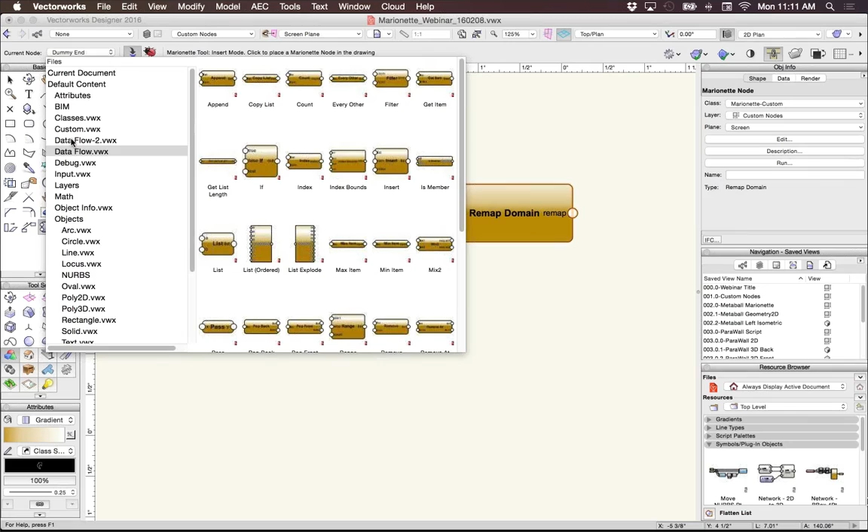And we'll call it data flow 2. So if we go back to our original file, and now when we go to the library for Marionette, you see that the data flow 2 has shown up, and there are our 3 nodes ready to be used in our drawing.

As with the last webinars, once we have saved the file, the files I show can be downloaded after the webinar. So all of these nodes and definitions will be available for you to use and study in your own time. Some of these custom nodes are already available on the forum.

Okay, do we remember this definition from last webinar? We used it to demonstrate debugging, but we didn't get a chance to see what it actually does. So let's run it now.

And we see that it creates a sphere of slabs that can have a certain thickness and a certain distance between them.

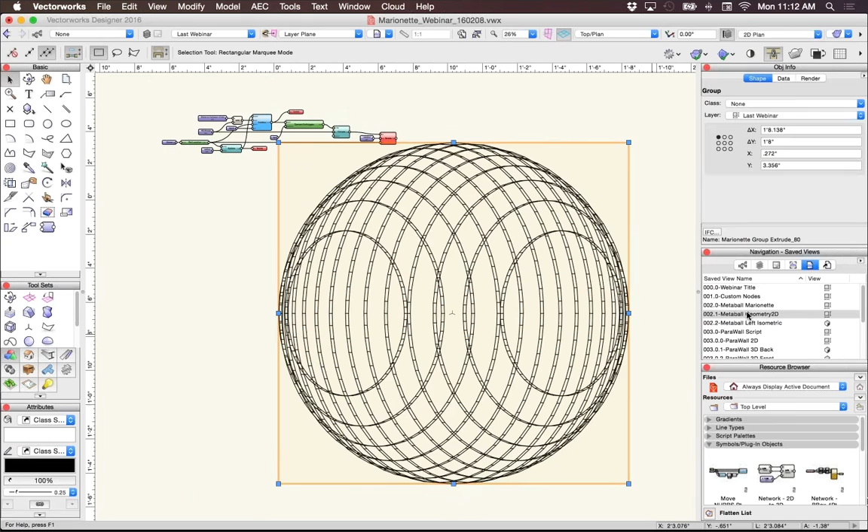So to refresh our memories, let's turn this into a Marionette object. It's a prime definition for doing this. So first, we need to change the definition a little bit.

The way I work with definitions, when I have more than one on a layer, instead of having all the geometry show up at the origin, my trick is to put a locus point in the drawing and then name it, and then put in a name node and a get location, and use that as the origin point for my geometry. But if we're changing this into an object node, we do not need this.

It'll automatically center on the wrapper. So we can delete these two, and we can put in a Point3 node. That's defaults are set to the origin.

So now we can wrap this up. And I could turn this into an object node if I right-click on it, but first I want to save the definition inside as a symbol in case I want to change it. So let's go to Modify, Create Symbol. And then we're going to uncheck Convert to Group.

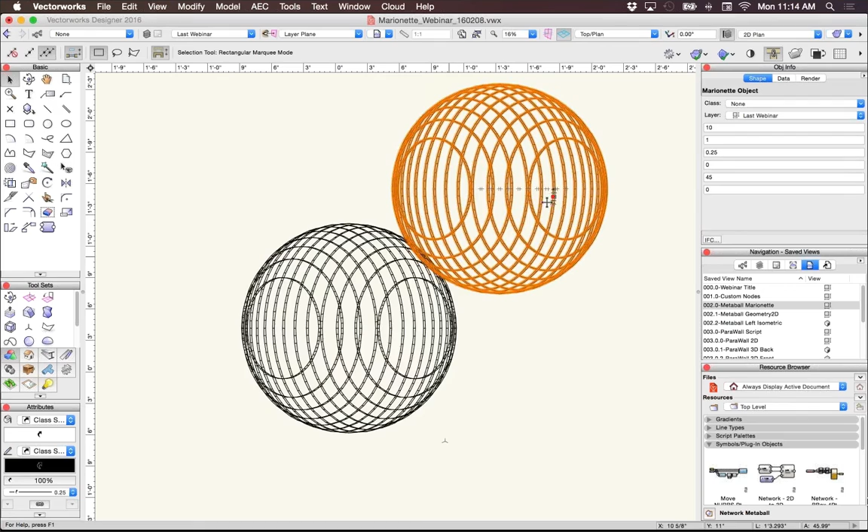And now, let's turn it into an object node. So here we have it, and we have the editable parameters on the side. I can make several copies, and I could change the parameters on each of them if I wished.

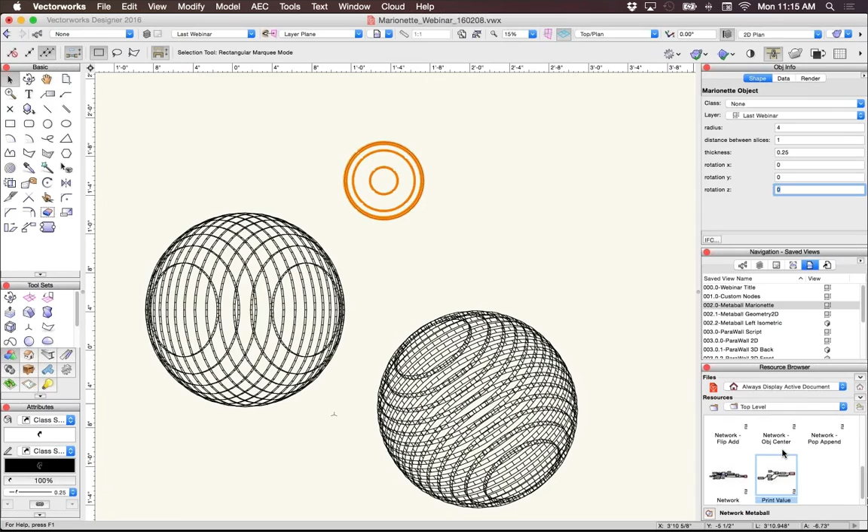So now I have the same object node, but it's been copied and changed around. But say I want to change the definition, and instead of using spheres, I want to use some other 3D object like a cone. So let's get our network back and go to Edit 2D Component, and let's change the sphere node to a cone node.

So this also has another parameter that we can add in. Basically, it's the length of the cone if we want to make it different than the radius. We'll call this height, and we'll make it the default 20.

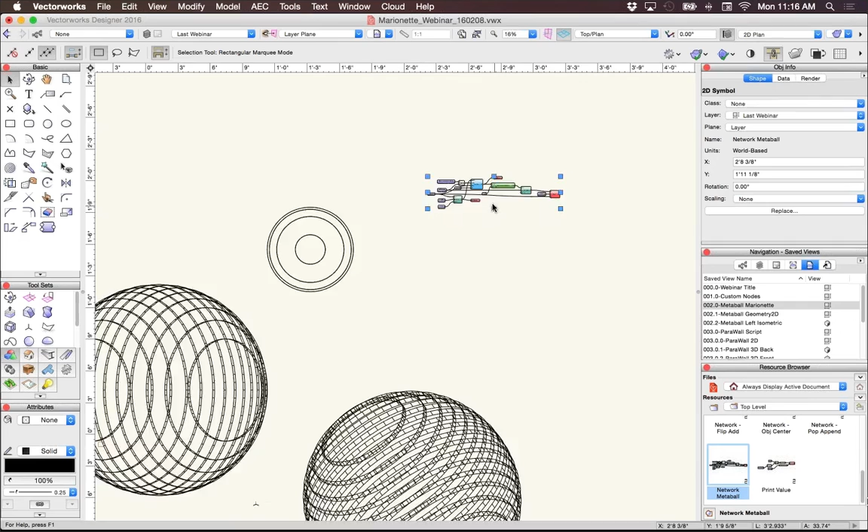And now we'll exit the symbol. We see now that they've been updated, all of these objects have been converted to cones, but they've kept the different parameters that we changed, as well as added this new parameter with the default value.

So are there any questions at this point?

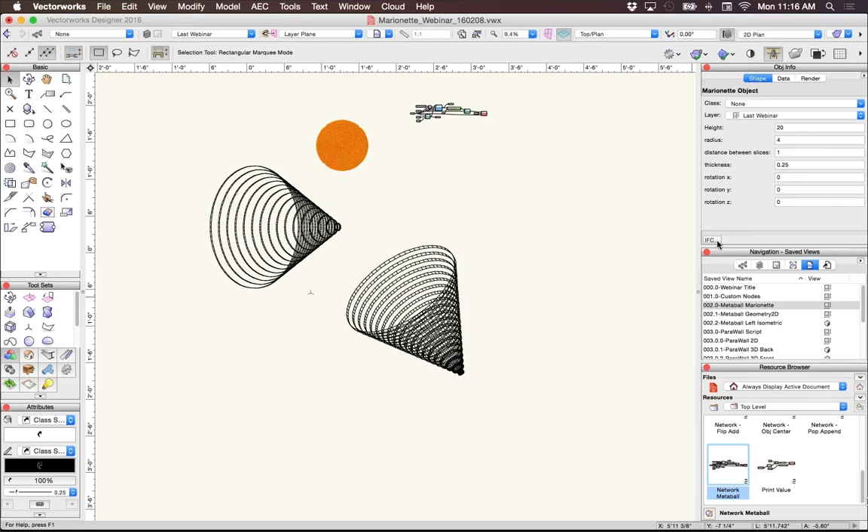When creating a 2D polygon or 3D polygon, how do you instruct what order the points are created? Well, a good way to do that is to use an ordered list node, which is in the data flow category. Actually, it's called list ordered. So when you have your points, you can put them into the inputs of this node in the order that you want, and then you will always have the list come out in that particular order.

So let's look at another definition. This definition uses the random node that we saw last webinar, as well as get and set rectangle. The get and set rectangle nodes used in this definition were edited by Marissa and now include a drop-down menu that allows us to choose an anchor point for our rectangles, just like we can with a standard rectangle in the OIP. We're also going to use Marissa's chunk list node.

This definition creates a gridded wall with openings on one side that taper into random size openings on the other. So let's see what this looks like. It's a heavy script, so it always takes a few seconds to run.

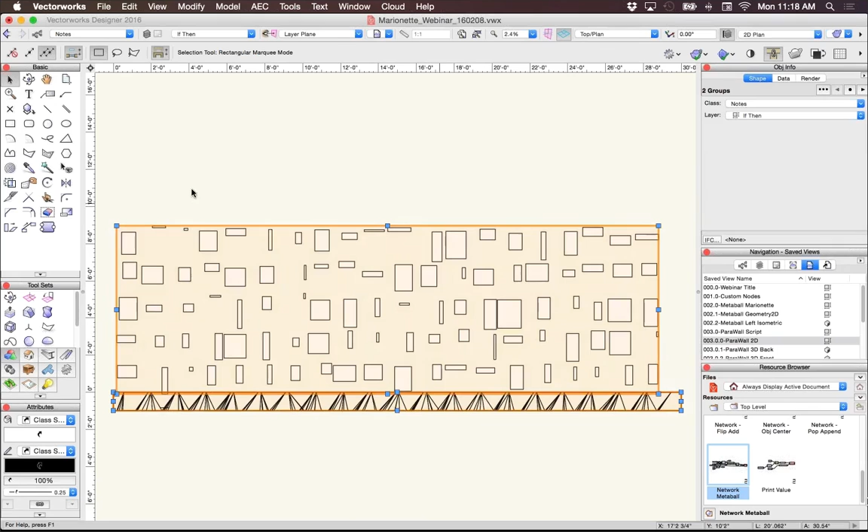So this is what the pattern is. And then this is the back side of the wall with the original grid. And the front side of the wall with the random grid.

So let's break down this definition a little bit. First, we're just drawing a rectangle that will be the outline for our wall. Wall length 30 feet, wall height 10 feet.

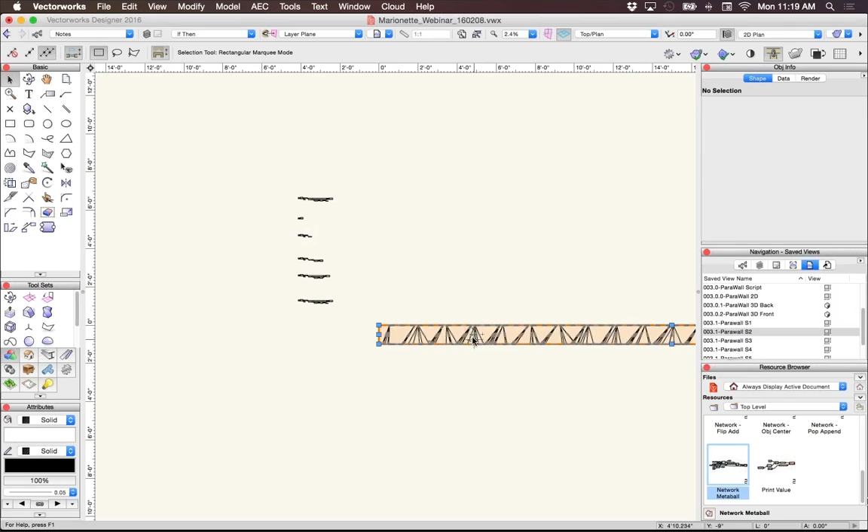And then we are adding the rectangular grid using this definition that we used last webinar to create a grid. And if we look at it, let's delete this. And if we run this, that's what it looks like.

So the next thing we're going to be doing is we're going to be randomizing the rectangles, and then resetting them. So now it's going to look something like this.

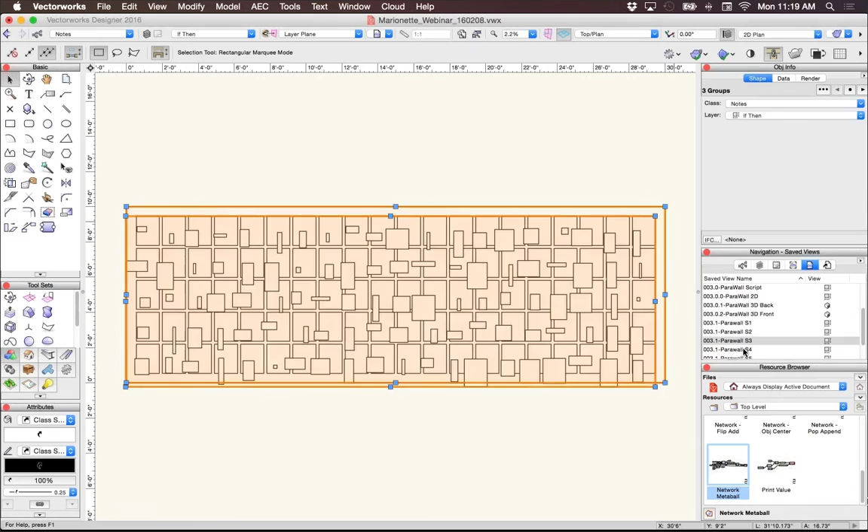And now for the last part, we're going to extrude the two rectangles, extrude the wall and attach the two rectangles with a loft node. So this is where the chunk list node comes into play.

So right now we have two lists of rectangles that have been converted to NURBS curves, the standard rectangles and the random rectangles. And if we zip those two lists together, we get the first one, first regular rectangle, the first random rectangle, second regular rectangle, second random rectangle, and so on.

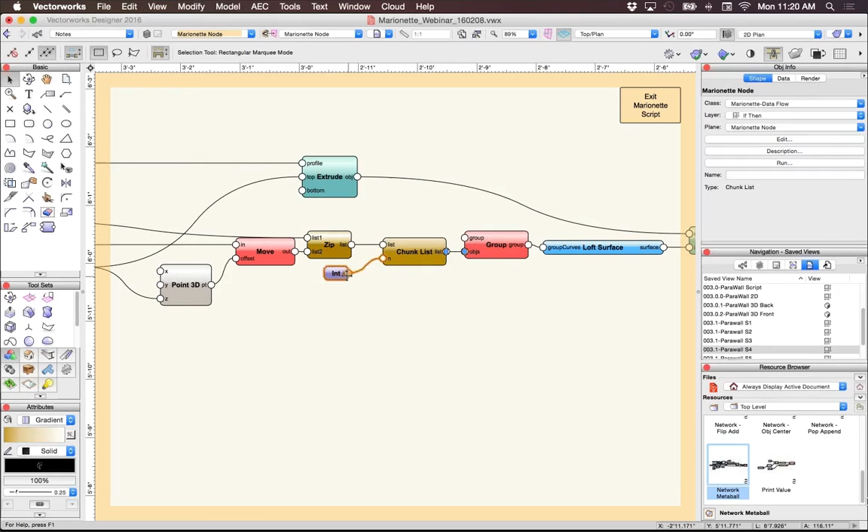And what we want to do is to create a series of lists that each have two of those rectangles in them to then loft them. So this is the chunk list. If you give it an integer of 2, it now, instead of lofting all the rectangles together, it'll loft 2 and then 2 and then 2.

Taking a minute here. So that's what we get.

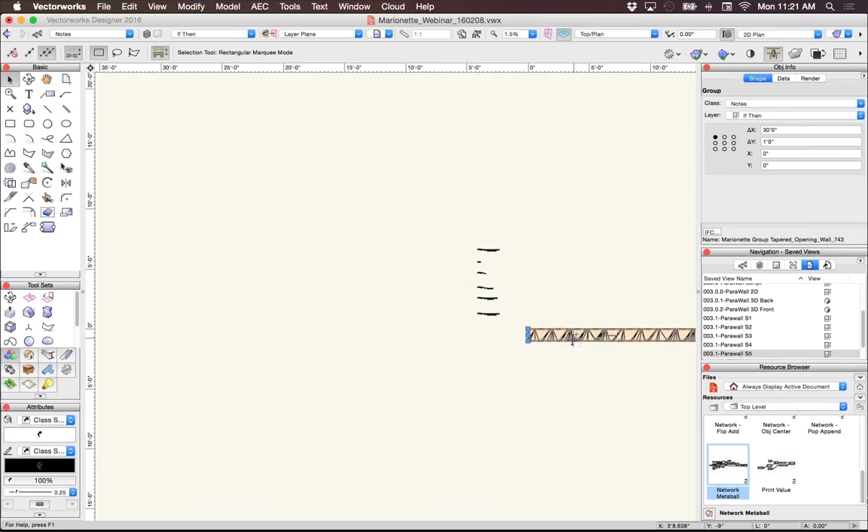So when using the random node, it's important to remember that every time you run the definition, the random numbers change. So in this part, I added a chance to show the random rectangles in 2D form so that they can be saved for later. And so this is what we get.

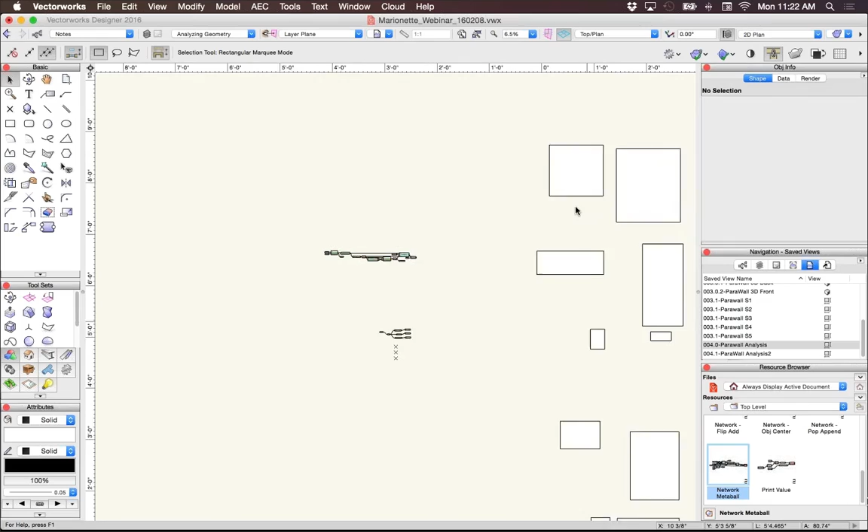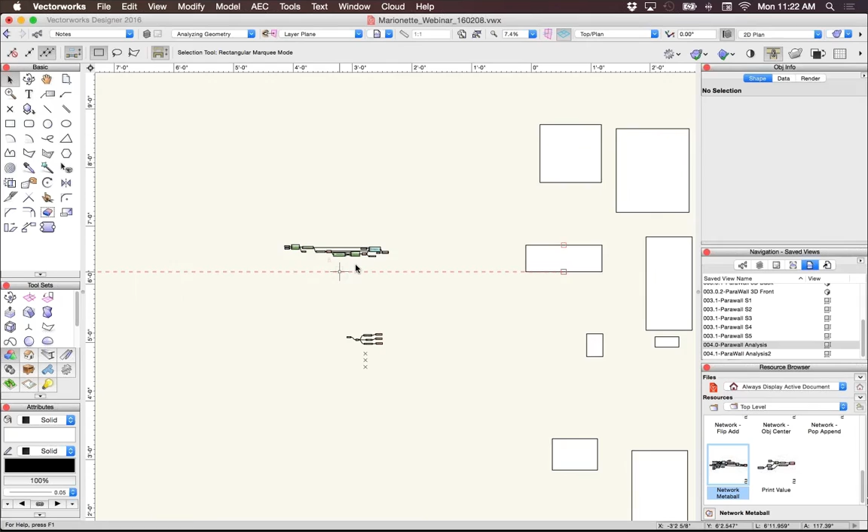So the great thing about Marionette is... oh wait, I want to add some conditions to this. Totally forgot. So we have this wall, but we want to make sure that the random rectangles meet some sort of conditions. So let's add some conditions. Say that we don't want any rectangle to be more than twice as high as it is wide. If it is, then we'll flip dimensions. So we're going to be using some conditional nodes and the if node. So let's go back here.

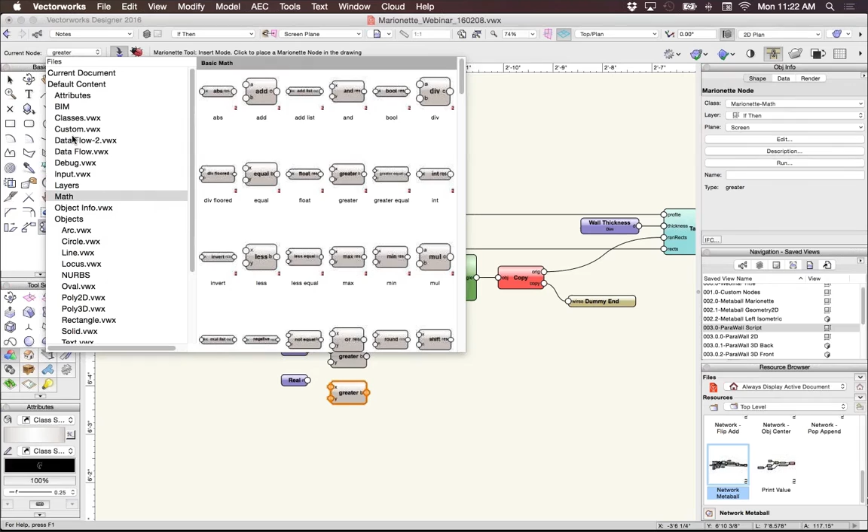Going to get some real nodes. Going to get greater than node and the all-important if nodes. We're also going to want multiply nodes because we're going to be comparing multipliers. So if we want to make sure that we don't want any rectangle to be more than twice as high as it is wide, we can say take the height, and then we can take the width multiplied by 2.

And put it into this greater node. So now, when it takes a value, if the height is greater than twice the width, this Boolean will be true, and if not, it'll be false. So what we want to do is attach this to our if node, and if it's false, we want to keep the height. But if it's true, we want to flip them. So we'll make the width the true option.

Now let's move these down out of the way. Give ourselves some more room. So since we did that for the height, we also have to do it for the width.

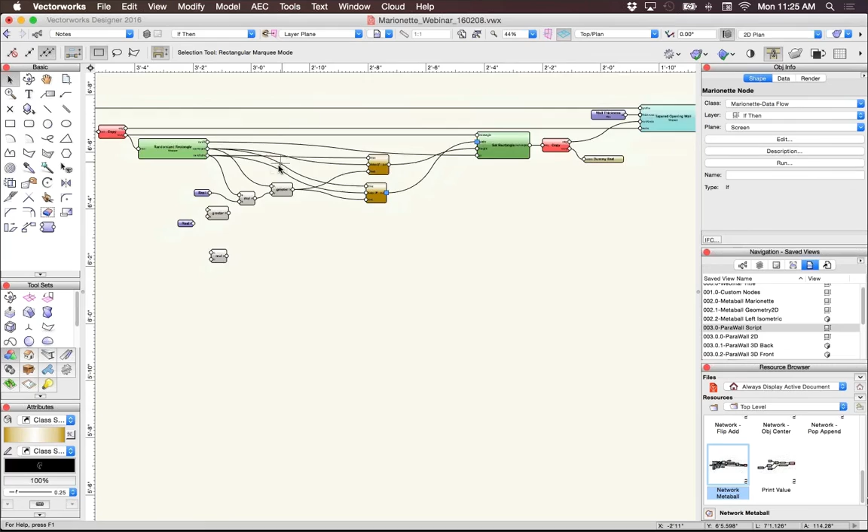Oh, looks like we have more than one definition that got run. So let's run it again.

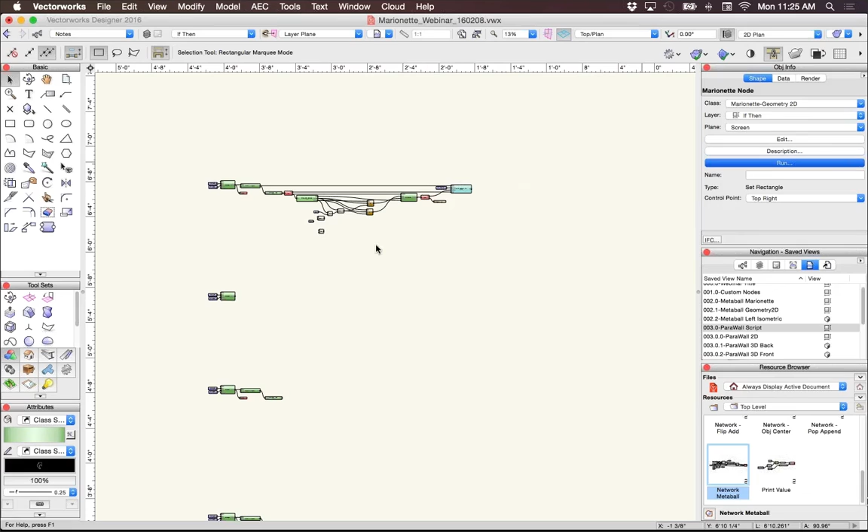As we can see, we don't have any tall rectangles. They're mostly either a standard ratio or they're very wide rectangles, because we flipped all of the ones that would have been tall. So you can imagine there are lots of different conditions you can put on this.

Like, I could say, instead of doing that, I could say I don't want either width or height of each rectangle to be greater than 3 times its other dimension. And if it is, we'll bring it back to a ratio of 1 to 3.

So I can do this by, if I keep this same definition and I change it to 3, but instead of flipping them, if it's false, if it's true, then I want 3 times the width to be my height.

So let's add another, and vice versa. If this is true, we want the height to be 3 times the width.

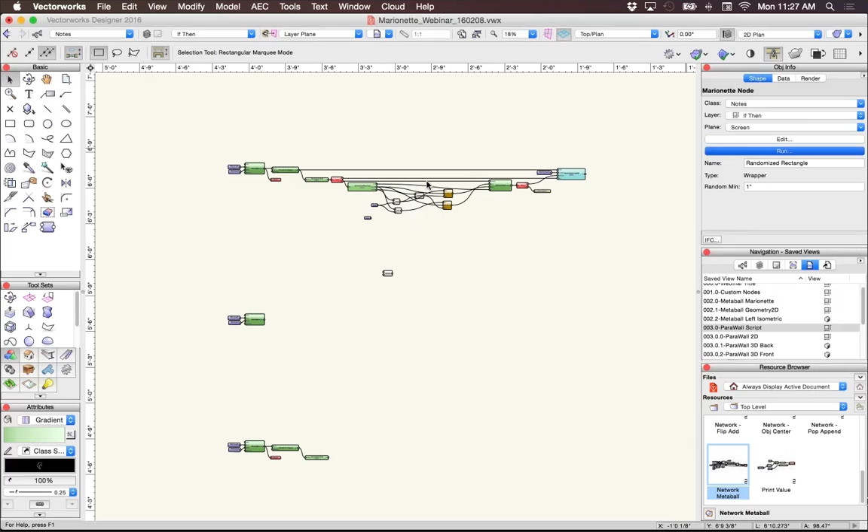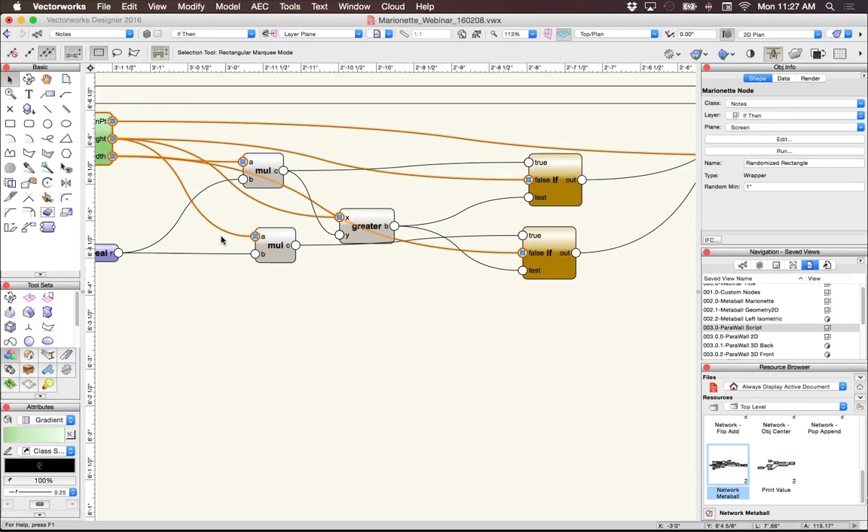So let's run it again. Okay, that did not work like it was supposed to. Oh well, I think you guys get the idea.

Are there any questions at the moment?

Is there a replace node with a command rather than having to rewire? At the moment, that is not something that we're capable of doing. It's definitely something that we're thinking of implementing in later versions.

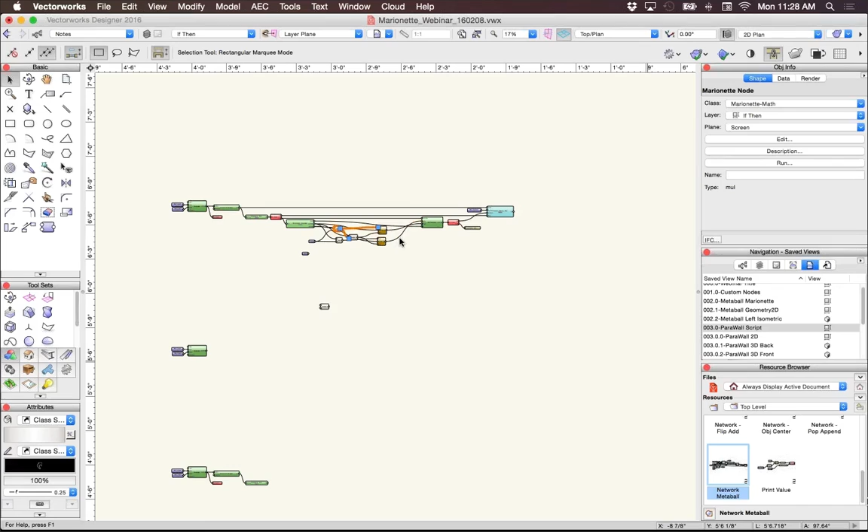Another question: after creating a network and saving it as a symbol in your personal library, is it possible to send a completed network to another computer? Yes, and that's simply by using the same principles you do in transferring symbols in Vectorworks.

So as you can see, I have 3 files open right now, and if I want to get symbols from another one, I can open the other file, and there are the symbols, and all I have to do is drag them onto my file.

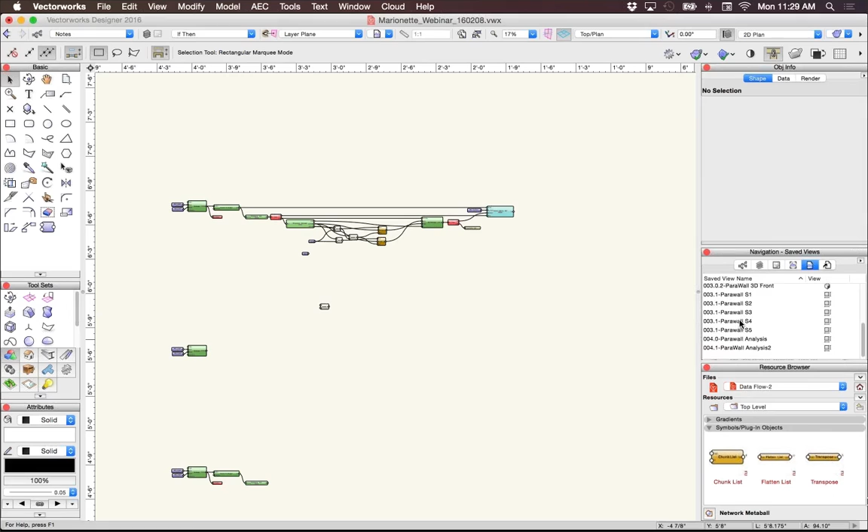So let's go back to our wall again without our conditions, and talk about analysis. We can find out the specs of our parawall by applying some object nodes to the definition.

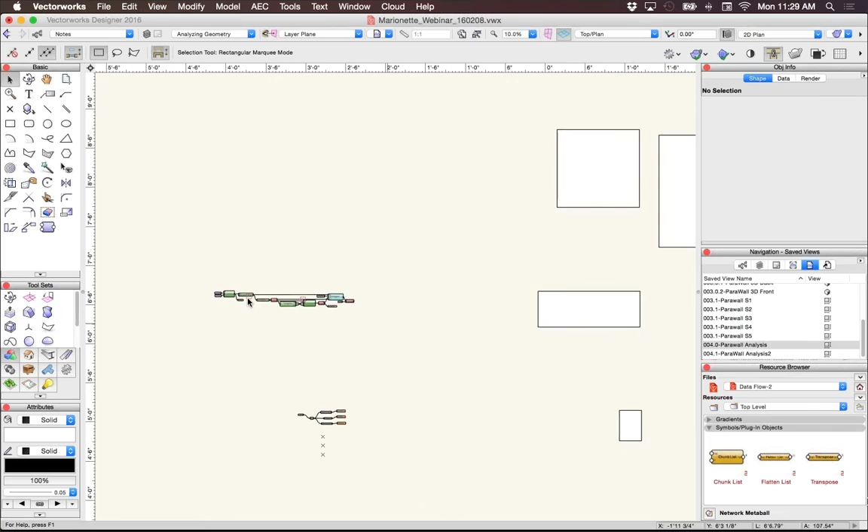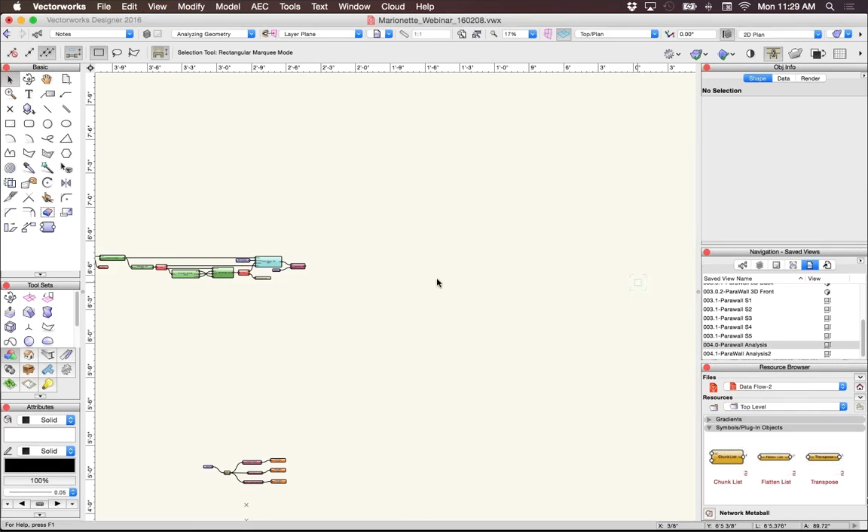The one thing to remember about the random node, as I said before, is it changes every time. So I don't want to keep running this definition when I want to find specs. So what I've done is I've added a set name node to the end of this definition, and I've named it parawall. So when I run this definition, the object I want will have the name parawall, and I can use that name to analyze it. So let's run it.

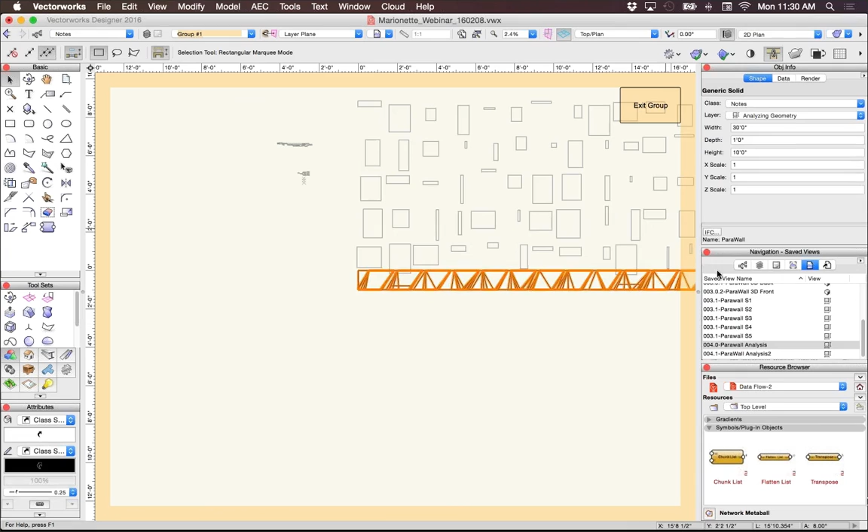So let's just double check. We go to our wall. We see it's a generic solid, and it has the name parawall.

So now let's get some information about it. So we have our name node, parawall, and this first wrapper has the get 3D info object info node, which will give me the 3 dimensions of the wall. So I'll use that as my original volume.

And then the volume node does exactly what it says. It'll give us the new volume of the generic solid that we have input, and it'll also give us the surface area.

And what I've created here is a wrapper that will take the value that we're given and a title, and print it out onto our drawing. This is another node that Marissa made. I find I use it a lot in my definitions.

So if I run this, we see these text boxes pop up. The original volume of the wall was 300 feet cubed. The new volume is 169 feet cubed, and the surface area is 929 feet squared.

So these are just some very basic facts and data extractions that we can do using Marionette and on geometry. But we can also extract data using records.

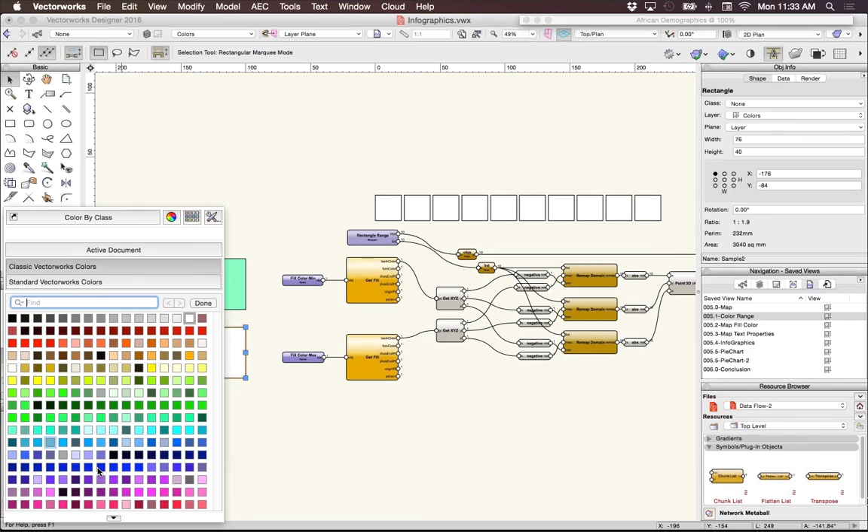So make this color. And now, when I run it, it'll look like this. Basically what it does is it takes a list of values and converts them into a corresponding color value with this node, the remap domain node.

This is a node that I created, although it can be made by wrapping a few nodes from the original library. What it does is it takes a list of numbers, and then if you give it the list, a new max and a new min, it'll remap that list to that new range. So basically you can turn any set of values into a new type of value for something that you're going to use later on.

So yeah, if you see, if I change the colors and run it again, it automatically updates.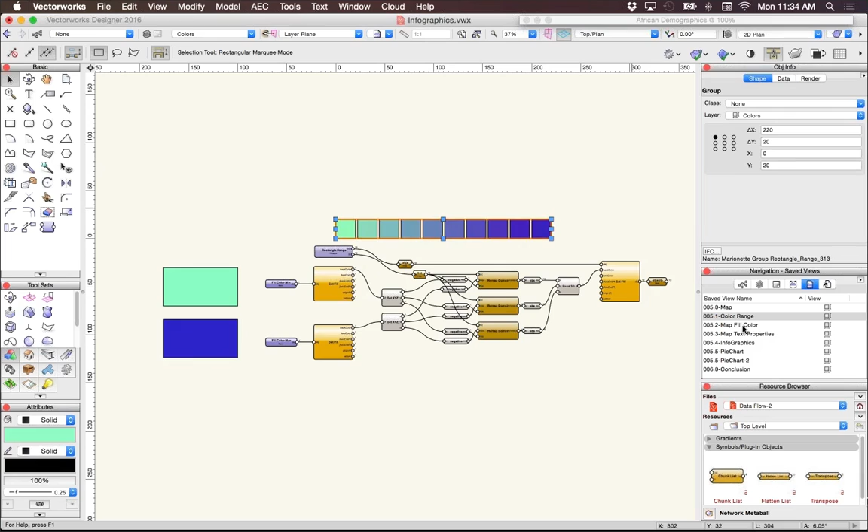So now I can do the same thing to my map. I can get the values I want to display using a getRecord field node, and I can apply those values to my fill range. A getRecord field node is in the library all the way down here in records and IFC. What this node does is it takes the info

from the record that was attached to the polygon. So if I give it the record name, demographics, and if I get the field name area, this will give me the field value. Sometimes when you're using this node, even if the field value you're looking for is written as a number, it sometimes gets seen as a string by Marionette. So I always put a float node after the field value to make sure I convert that to a floating number or a real number.

And here are sample boxes on this definition. So now we have this definition set up so that the values will alter by area. Let's run it. And we see that every area gets a new color value based on where it is in the list.

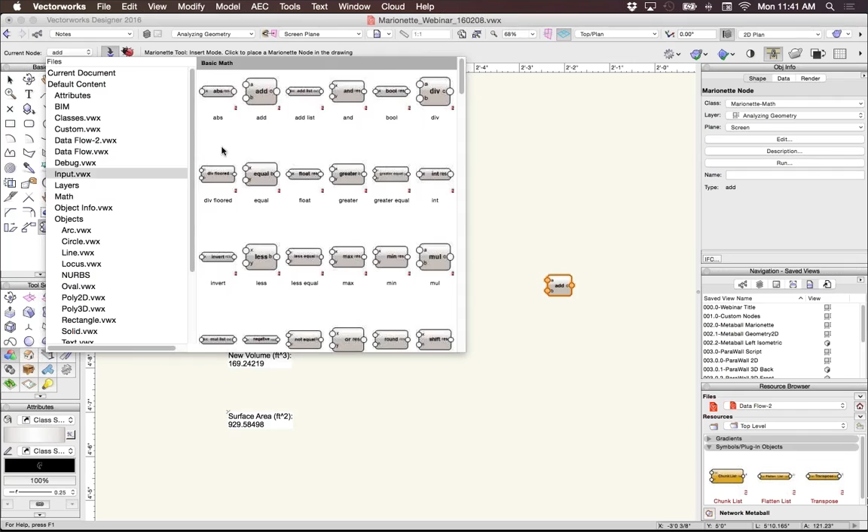So let's create a definition, exactly what you asked. Let's add some numbers. Let's add 578 to 3,246.

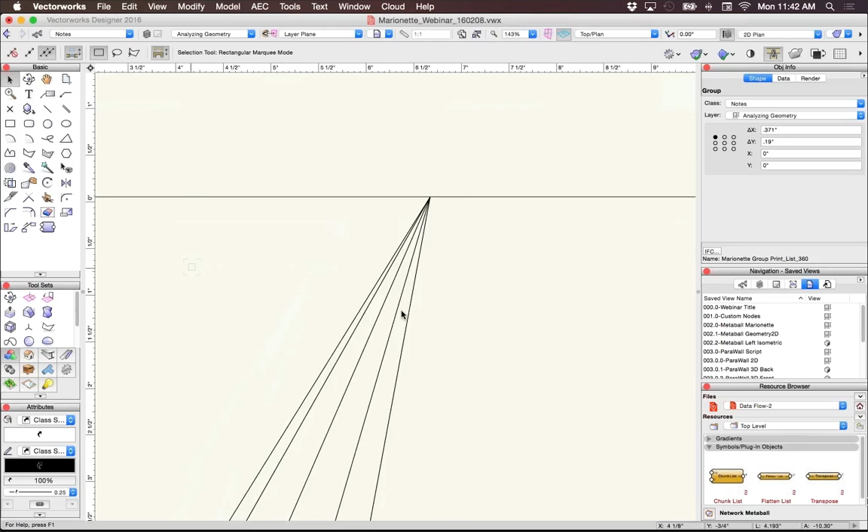If we get this print list node, this is in my custom category. You run it, and then we go to the origin, and we see that this is the number, the answer to the mathematical problem.

Another question. When you input your data request, is there a drop-down list of the records available, or do you just have to know exactly what type?

Well, the way records are set up in Vectorworks is whenever there's a record attached to an object, you see it pop up in the resource browser under record formats. And if you click on edit, you can see what all the field names are and what the default types of values are and the default values.

And when you go to click on an object, you look at data, you see that the demographics record has been checked. There can be lots of different records within a document, but whichever one is checked will be the one that's applied to that object.

So it is important to know what the names are and to copy them exactly as they are when you're using a get record field node, because you are going to have to use a string.

Okay. We have a little time left, so let's go back to that conditional question and see if we can figure out what went wrong.

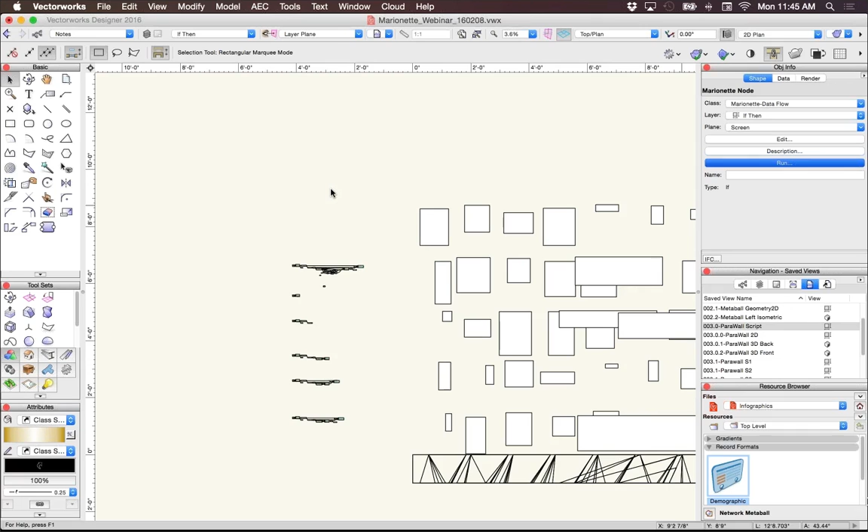Instead we'll be using 3 times the height versus using the width if it's false. So this is what it looked like before, which was wrong. Let's run it again. So now we see that none of the rectangles are too wide or too tall.

So as you can see, these can get rather tricky, but if you can think of it, you can probably do it in Marionette.

We have one more question. Is there a way to programmatically get a list of all the fields in a record? There is. It would involve creating a wrapper node that would query each field and then output it as a list. It's something that you can build based on the definitions that we have here in this file.

And I remember someone asked a question last webinar, how long did it take me to learn Marionette? Well, I knew how to use Grasshopper pretty well before I started using Marionette, and I think the first time I opened up Marionette was in August, so I've only been using it for 6 months. But definitely having the experience of another graphical scripting program helped me learn it a lot. It does show that it may look really confusing at first, but it's not a very steep learning curve, and once you get the hang of it, the sky's the limit.